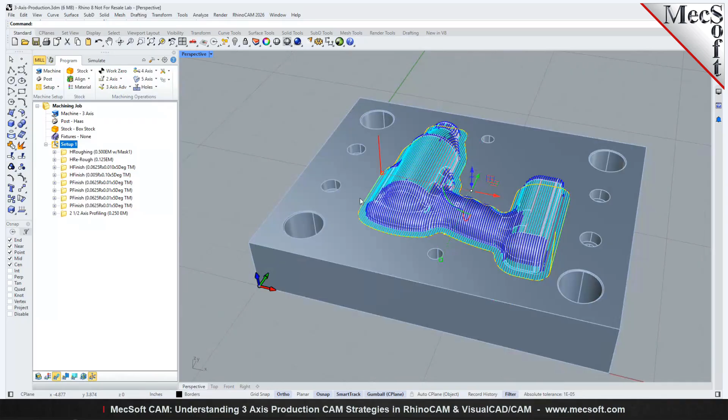So let's look at production 3-axis. So here we have a mold block with a positive core, meaning it's standing up from the mold block.

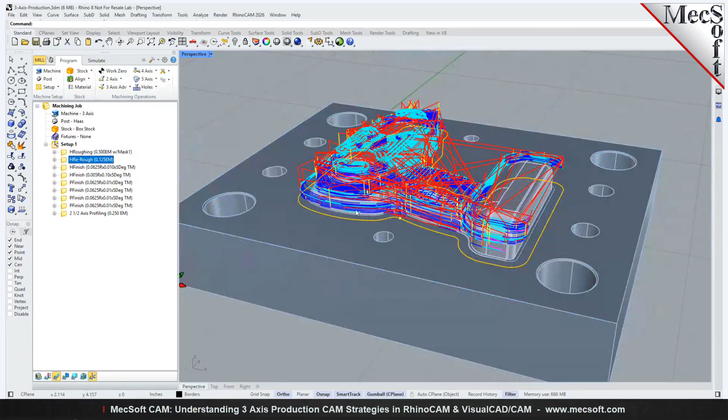So we want to machine that core. We're going to basically do a roughing, then a re-roughing. Based on this roughing, after it simulates, it'll go back and calculate where there's still stock left on the part using a smaller tool, and it clears more of it out for you.

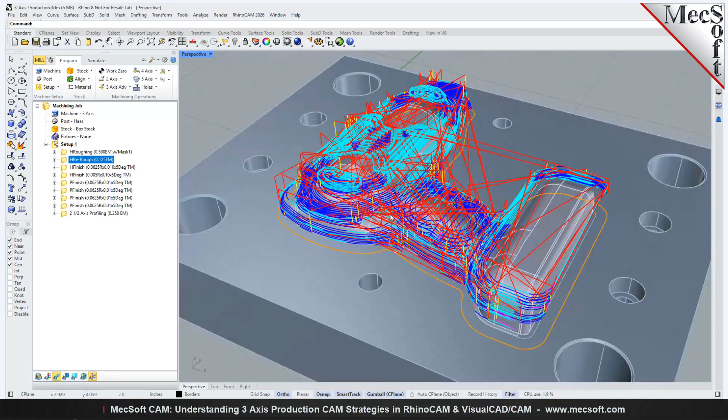So that helps your finishing passes, putting less stress on your finishing tool to get as much material out of there as possible. So we have a number of different finishing tool paths here. On this tool path strategy, it's a horizontal finishing.

So in horizontal finishing, it cuts in levels. We want horizontal finishing, but we don't want to go up so high, so we're doing these almost near-vertical areas. There's a curve on it, but it's almost vertical. So that's where we use horizontal finishing for near-vertical areas, and parallel finishing for near-horizontal areas.

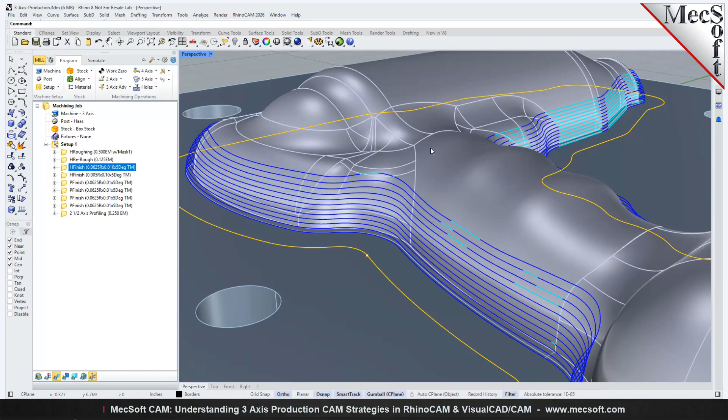So we got a horizontal finishing for the sidewalls. We also have a horizontal finishing tight right on the bottom. In a lot of cases on molds like this, you may need an actual sharp edge right there, but that's actually a complicated thing to do.

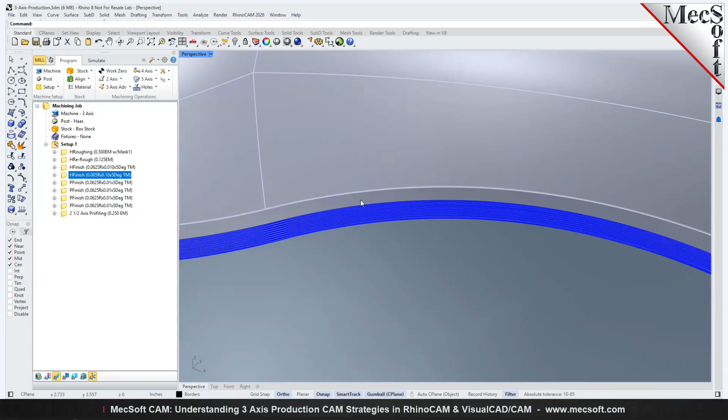If you have a tapered wall and you need a sharp edge, that's relatively complex to get a tool in there to do. So that's why we added a separate finishing pass right along this bottom edge, because from that operation, since this is a ball mill, it left some material there.

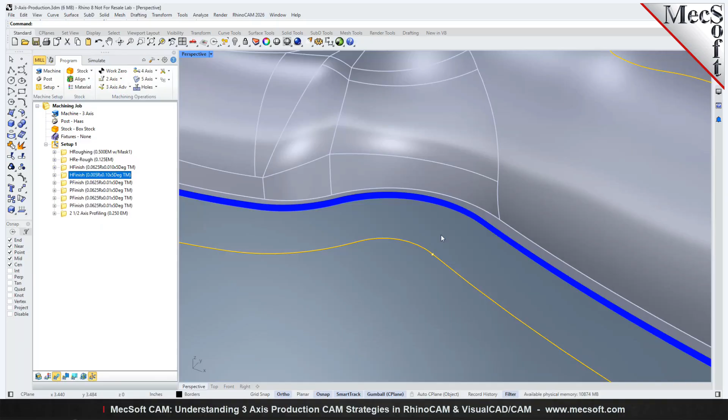So we did another operation really tight. Let's see what tool they used. We're using a 0.1 by 0.005 taper tool - it's a 5 degree taper with a 0.005 ball on the tip. So we're leaving 0.005 at this bottom edge. That's why there's a separate operation right at the bottom.

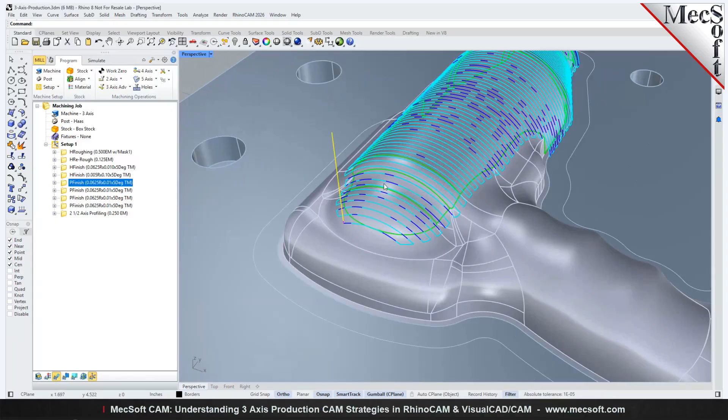In this case, we said for the contact condition to just go past it, so it went past the surface boundary based on the diameter of the tool, just to clean that area up. So we got one there.

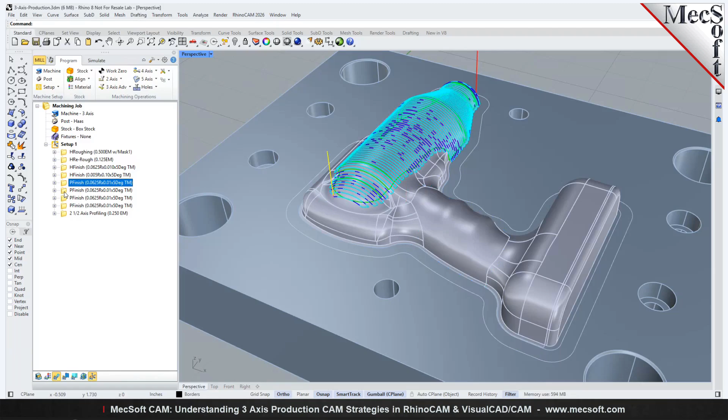Obviously, you would have a tighter step over for finishing, but we just leave it lax so we could show it to you easily. Now we have one here going in the Y direction. The blue motions are actual arc motions - that's a nice smooth arc motion.

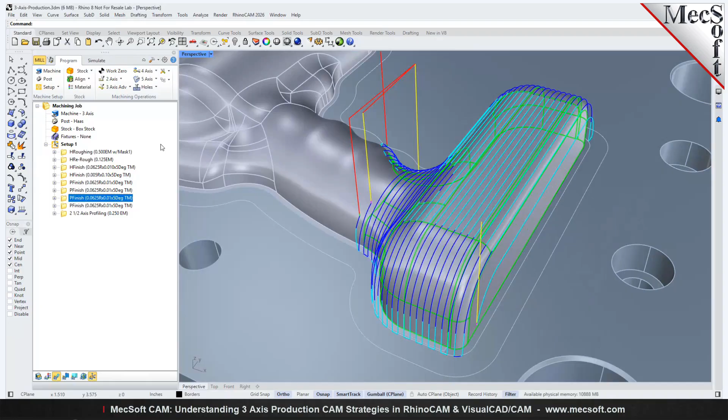And then we have another parallel finishing going in the Y direction for this area here. And then you can use parallel finishing just to go over and clean up the entire area of the core based on a boundary that we selected out here.

And we have some profiling. We're done with time - anything else you want to do, some post-processing or talk a little bit about that? Okay, and for post-processing here, I just picked the post.

We have 2 types of post. Legacy, meaning this is the standard post-processing that everyone gets. We call it legacy only because we added a new Python programmable post option. That was a couple of versions back.

Where do you want to talk about that, Joe? You can take a moment to talk about the Python post. Yeah, so the Python post is basically a completely new architecture that we implemented. It was actually implemented in 2025, but we've enhanced it in 2026 quite a bit. And it's pretty powerful - it's event-driven.

Because of the power of the Python programming language, we can do lots of interesting things in the post. So we're pretty confident we can handle pretty much any machine out there in the field right now. It's an interesting area that we worked on, and moving forward, that is the area we will be focusing most of our resources on. So you'll see more posts coming, more Python posts being developed from our end.

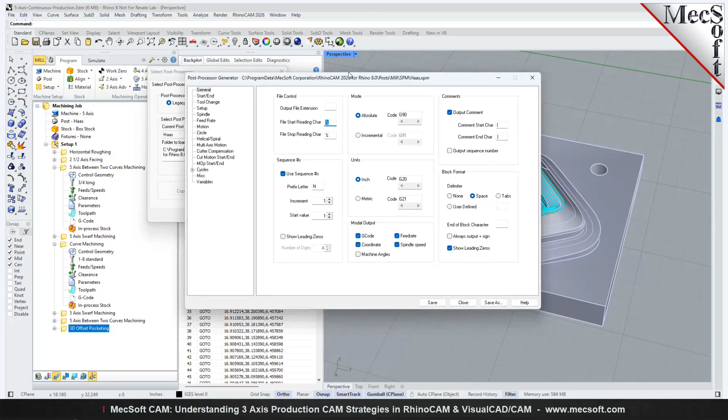Users can use it if they're familiar and comfortable, and they can set up their own posts. But if you need any additional help on the post processors, we can - if it's something simple, we can do it as part of your support maintenance agreement. But if it's something that needs a real project, it'll be a separate cost item. Our sales department can give you the information regarding the costs, and it'll depend on the machine complexity you have. So you can talk to us about that.

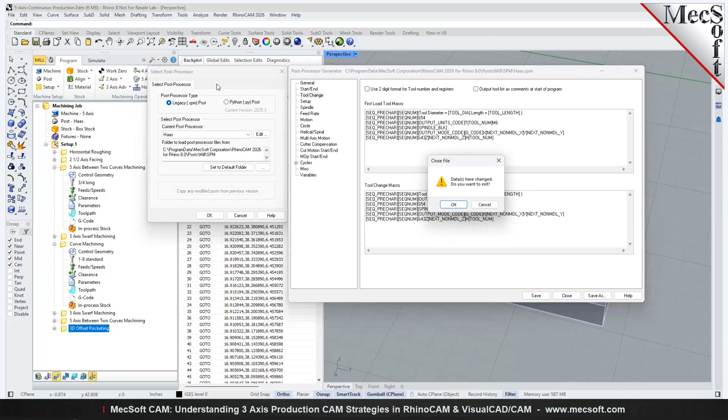Okay, what I did there is I just selected the legacy post. This is the macro driven post, our post process generator. I just picked edit next to Haas. And this is the post process generator.

As Joe mentioned, it's macro driven. You have all these macros in there for different types of areas of the code. For instance, a tool change - you have macros for how the G-code is going to be formatted when it does a tool change, etc. And you can work through all of these operation types, all kinds of drilling cycles, boring, etc.